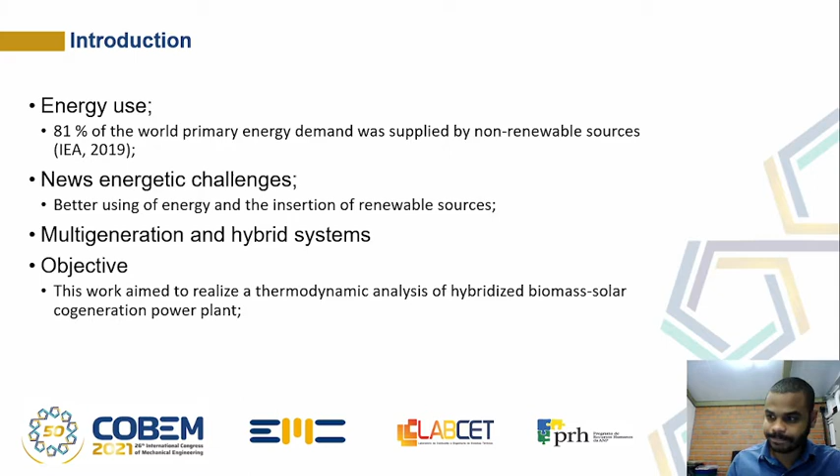With this in mind, multi-generation and hybrid systems can be used in order to achieve those challenges. So the objective of this work is to realize a thermodynamic analysis of a hybrid biomass solar cogeneration power plant. Initially, a biomass power plant was proposed by Siqueira Neto.

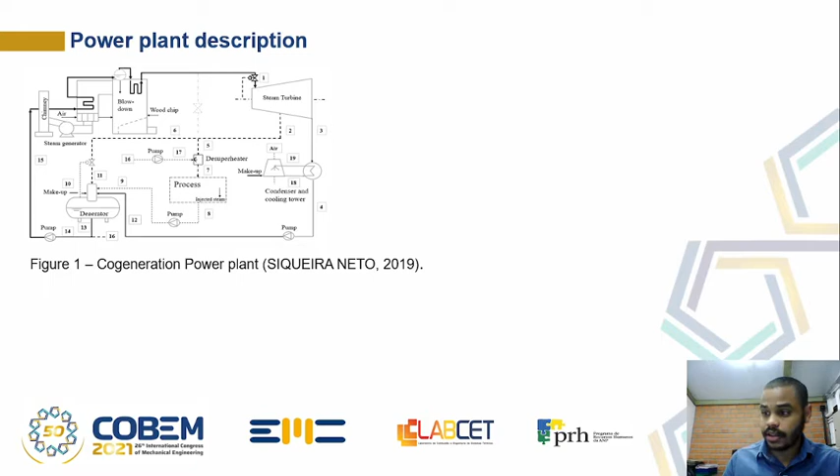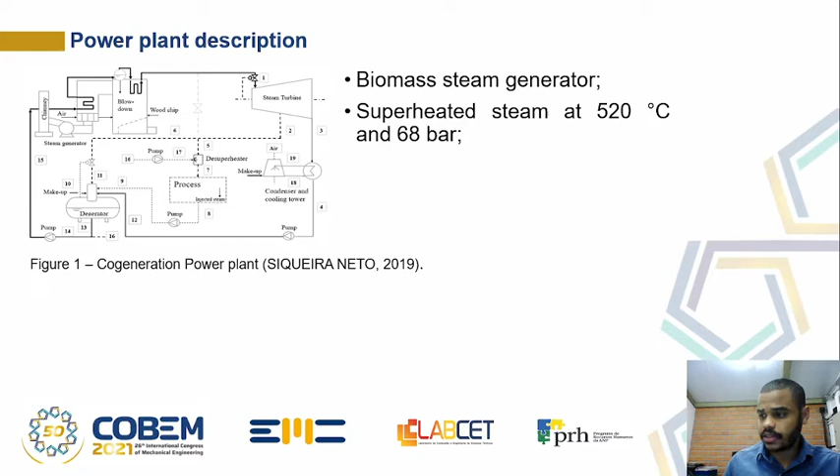It is illustrated in figure 1. This plant was designed to supply the electric and thermal demand of a real poultry industry located in Paraná. The plant used a biomass steam generator with a thermal efficiency of 86% to generate superheated steam at 520 Celsius degrees and 68 bar. The plant is able to ensure 12 megawatts of electricity and 16 tons per hour of saturated steam at 10 bar, doing extraction in the condensation steam turbine.

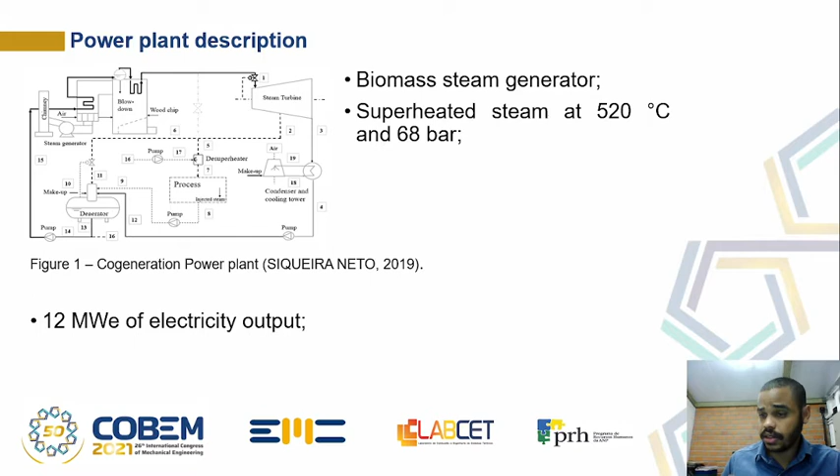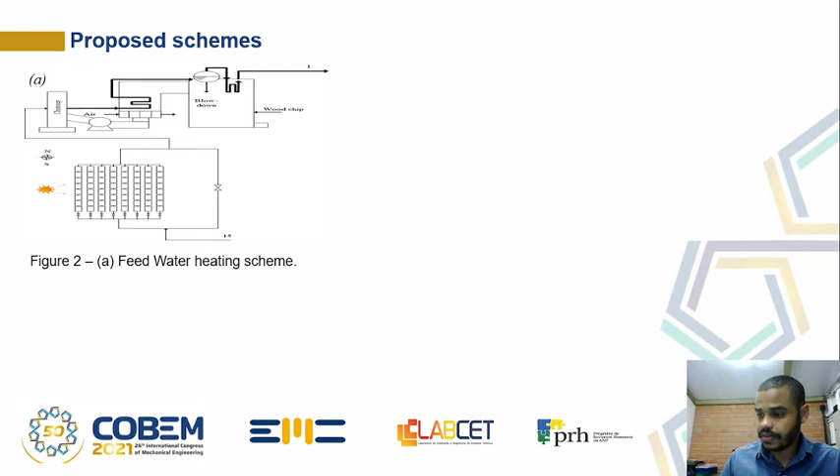Two different schemes were proposed in this work in order to combine biomass and solar energy. The first of them is illustrated in figure 2. It is a feed water heater scheme. Over 90% of the power plants in the world are using the feed water heating scheme.

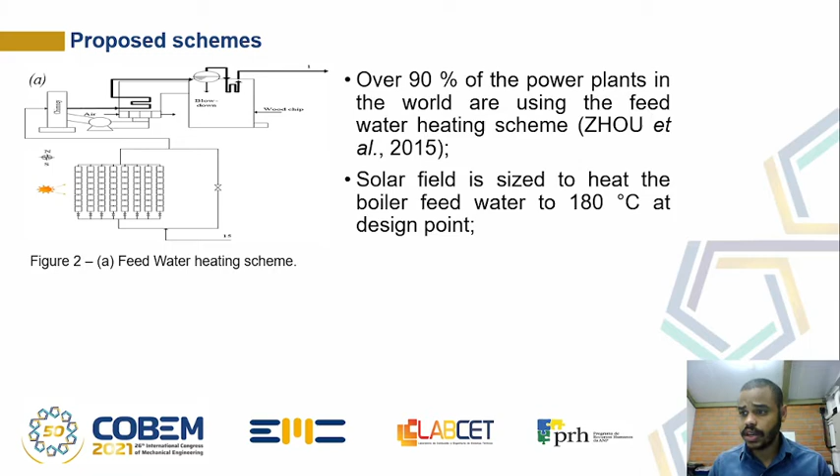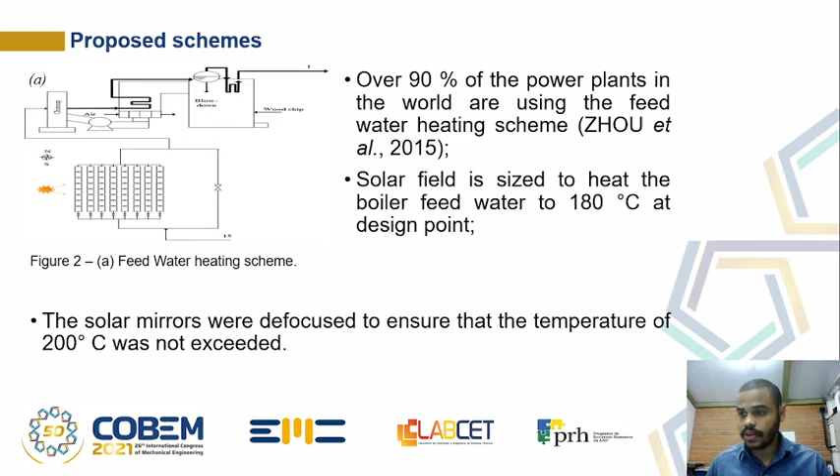In this scheme, the solar field is designed to heat the steam generator feed water to 180 Celsius degrees at design point. For off-design point, the solar mirrors were defocused to ensure that water temperature does not exceed 200 Celsius degrees, so as not to affect the steam generator operation.

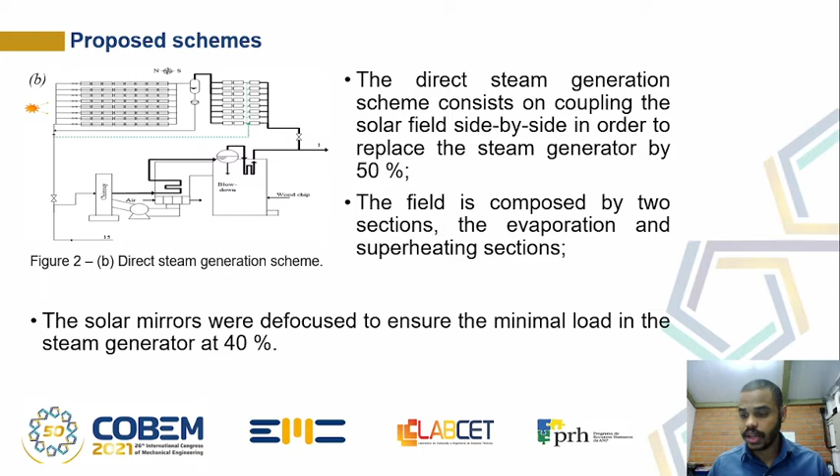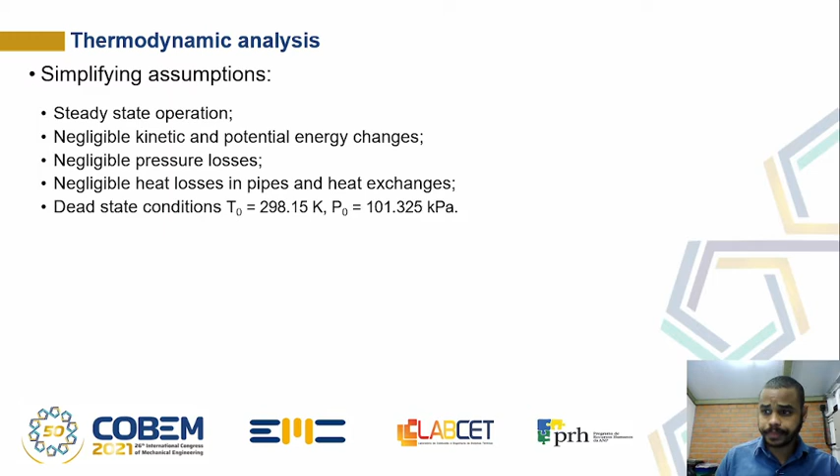Here we have the simplifying assumptions for our schemes: steady state operation, negligible kinetic and potential energy changes, negligible pressure losses, negligible heat losses in pipes and heat exchangers, but considering heat losses in the solar field, and dead state conditions. We applied mass, energy, and exergy balances to all components of our schemes.

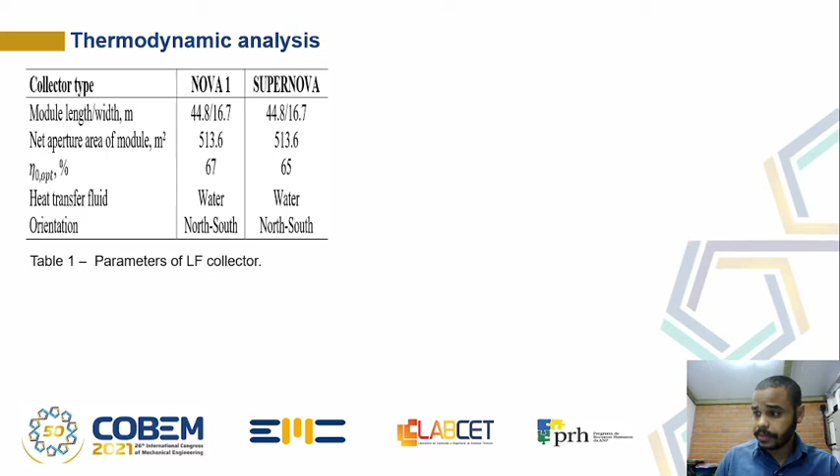Initially on this screen, we show the linear Fresnel collector parameters. To evaluate the energy entering the solar field, we need to take away the losses of the absorbed solar energy. To do this in the feed water heater scheme, we use a model provided by the manufacturer. In the DSG scheme, we also use a model but with a different model for the superheating section.

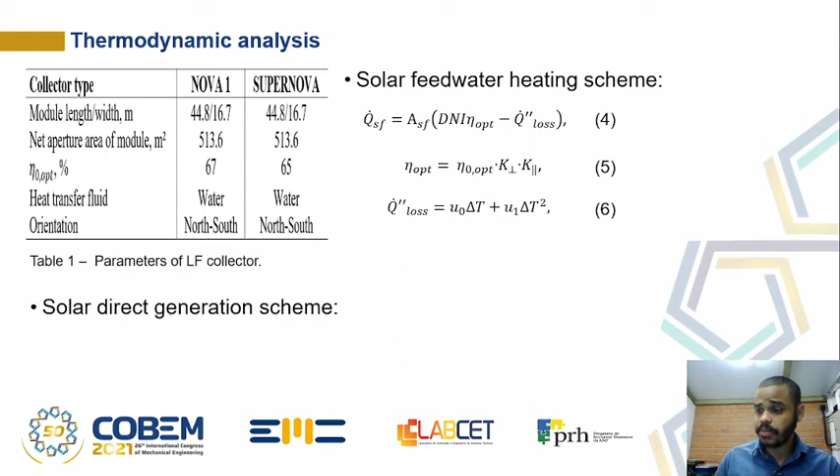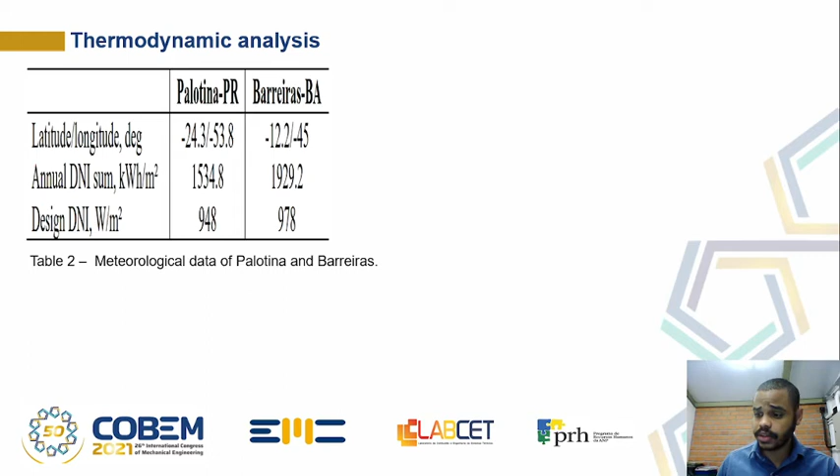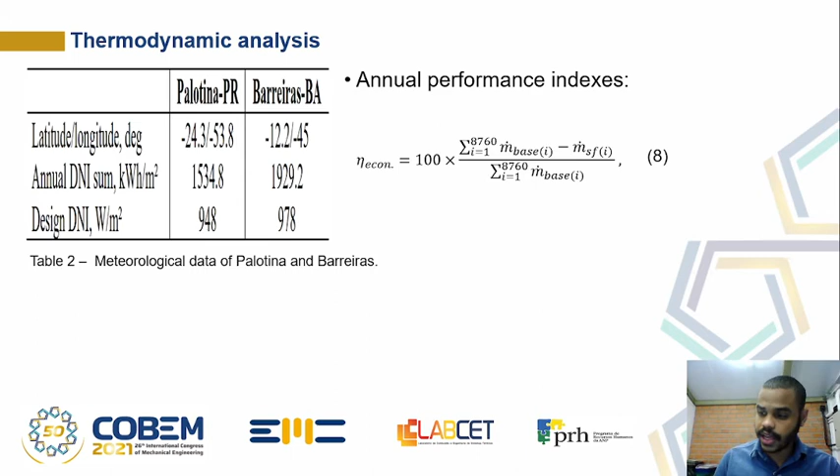Our schemes were simulated in two Brazilian cities in order to assess the region influence. Here we also have some annual performance indexes. The first of them is about the biomass savings related to the scheme without solar energy, and the second one is the annual solar radiation absorption efficiency.

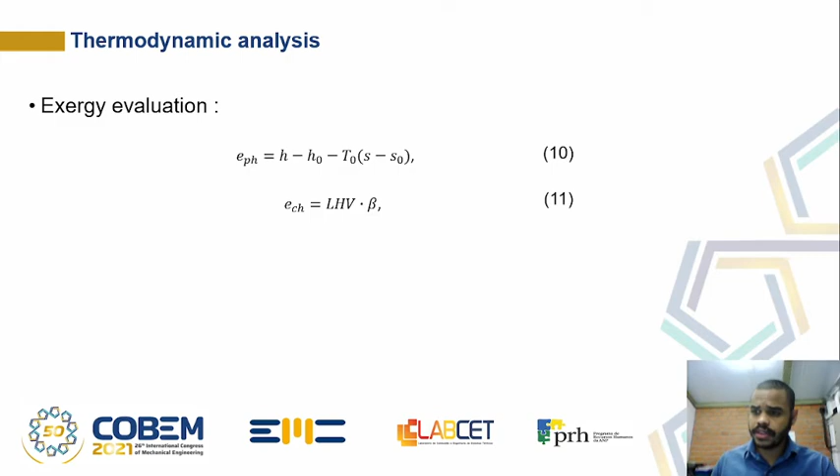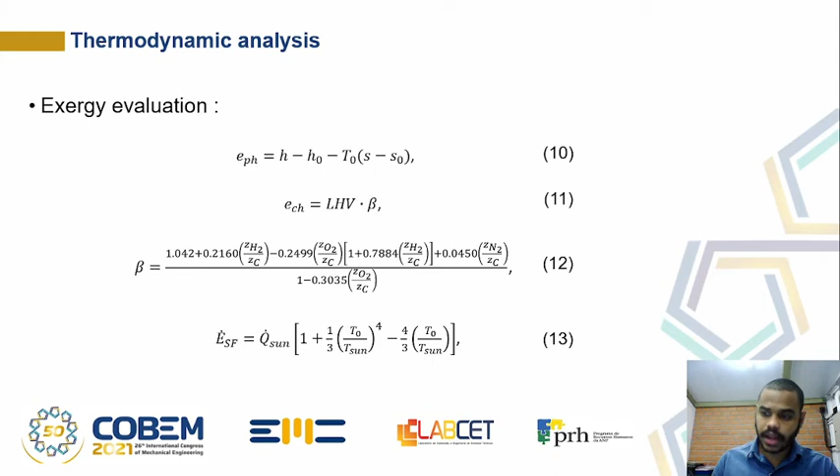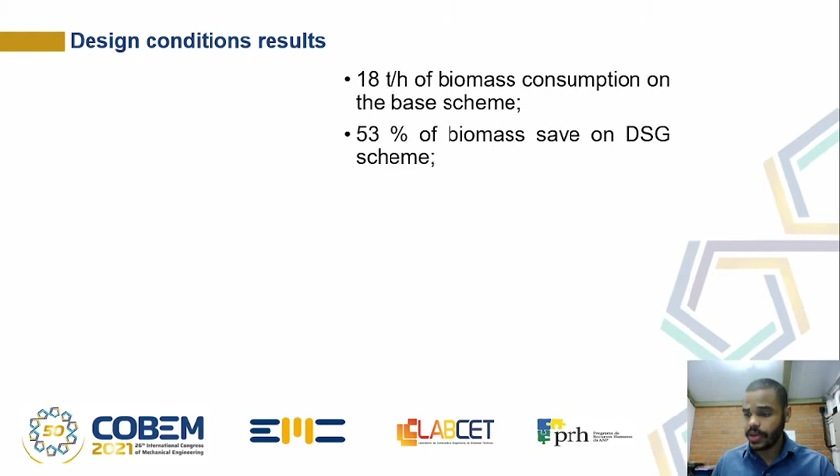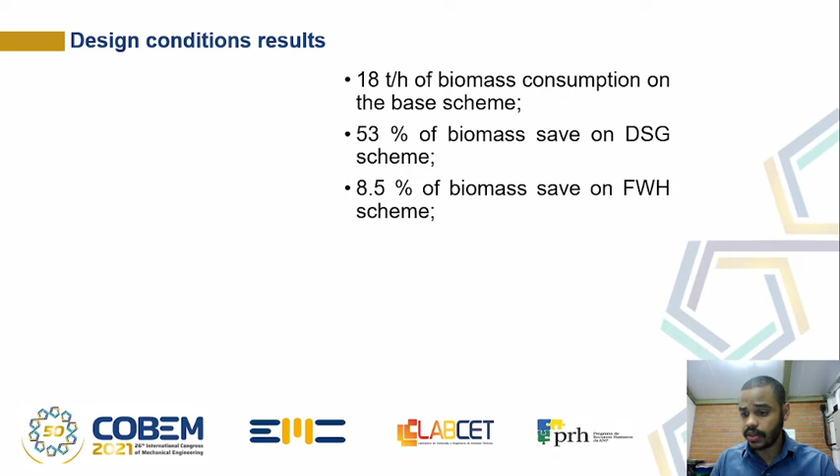Here we show the first results. They are related to the design conditions. The biomass consumption was about 18 tons per hour in the base scheme. In the DSG scheme, we can save 53% of the biomass consumption. In the feed water heater scheme, we can save

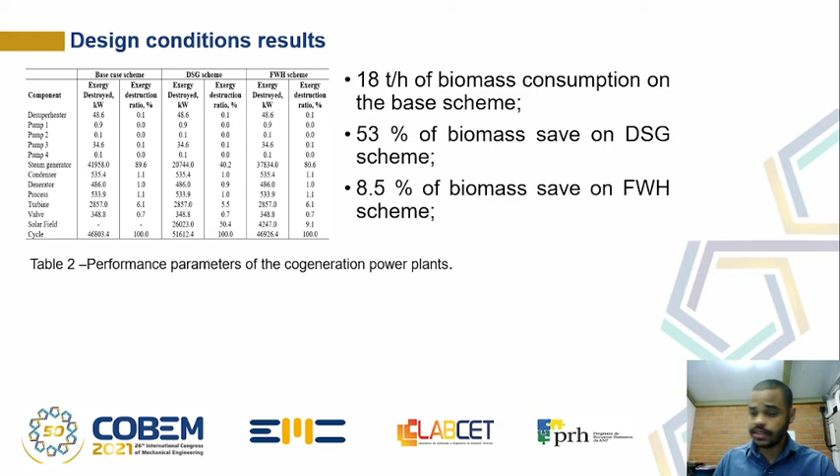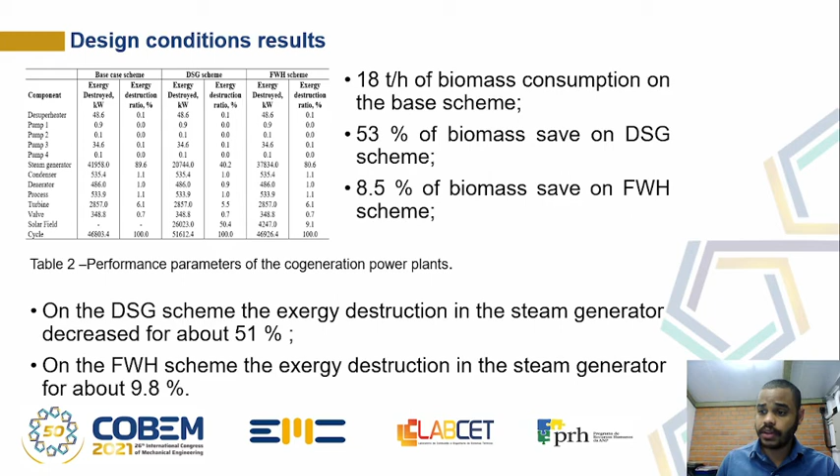8.5% of the biomass. Here we also have the exergy results. The main destroyer of exergy is the steam generator. When we couple the DSG scheme, we can decrease the exergy destruction in the steam generator by about 51%. And by combining the solar field in the feed water heating scheme, we can reduce the exergy destruction in the steam generator by about 9.8%, almost 10%. The overall exergy increases, but there is a lower destruction in the steam generator in both of the solar field schemes.

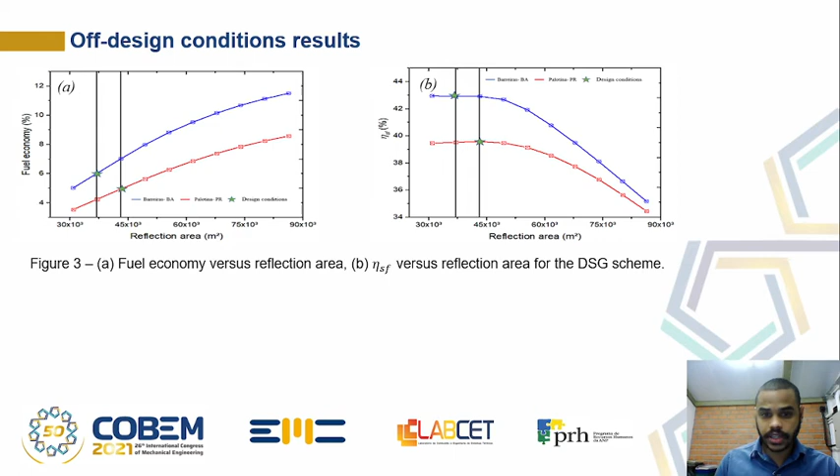Some results for the off-design conditions. On the left side of figure 3 we have the biomass economy. On the right side we have the solar field efficiency for the DSG scheme. The schemes were assessed in Palotina and Barreiras in a solar multiple range of 0.8 to 2.3. With an area at design condition, the fuel economy was 5% for Palotina and 6% for Barreiras. For Barreiras, even using a smaller area, it's possible to save more biomass because of the higher radiation levels in this city.

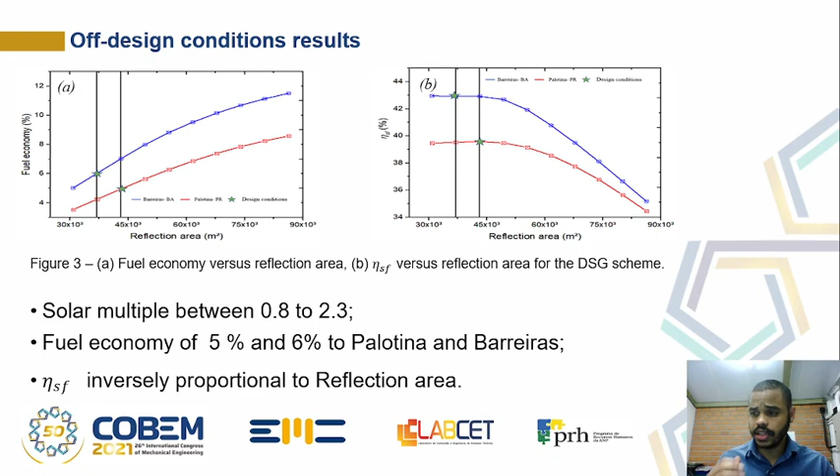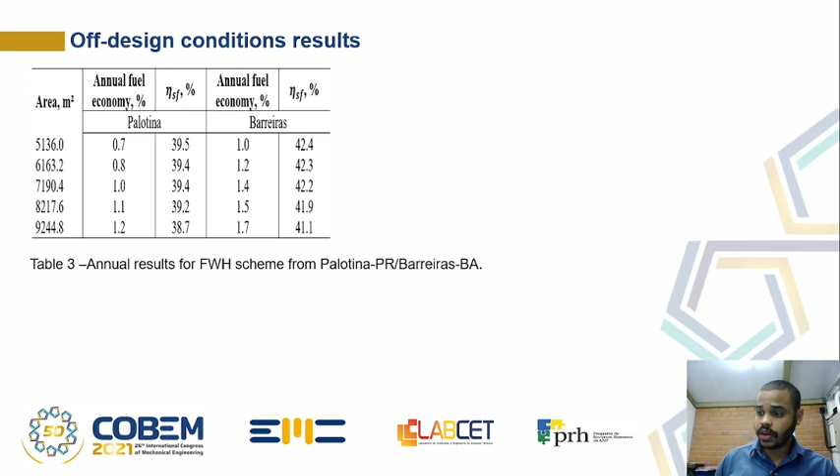Increasing the reflection area, it's possible to increase the biomass economy. However, the solar field efficiency decreased due to the necessity of defocusing to assure the minimal load in the steam generator. On this screen, we have the off-design results for the feed water heater scheme. The annual fuel economy was smaller than the DSG scheme, with slightly higher values for Barreiras. The solar field efficiency did not change more than 1.5%.

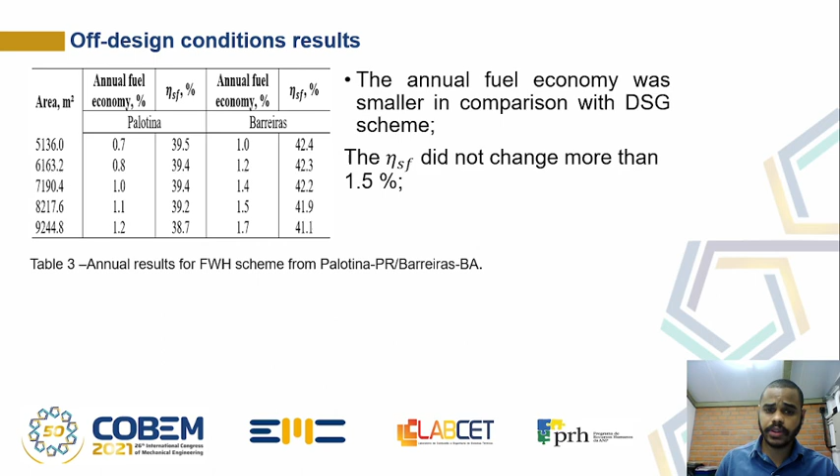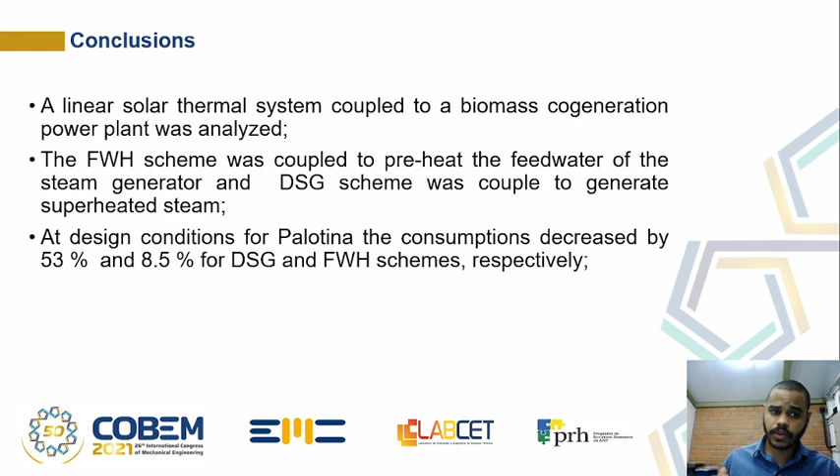Finally, in this work, a linear solar thermal system was coupled to a biomass cogeneration power plant. The feed water heating scheme was coupled to preheat the feed water of the steam generator, and the DSG scheme was coupled to generate superheated steam. At design conditions for Palotina, the fuel consumption decreased by 53% and 8.5% for the DSG and feed water heater schemes respectively.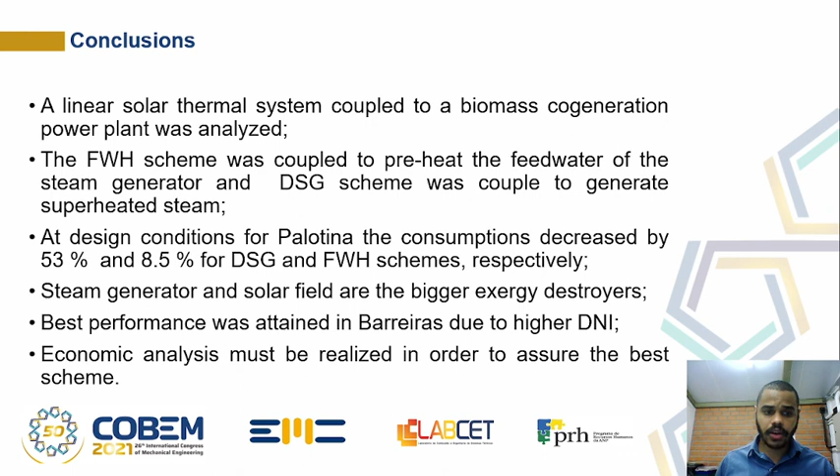The steam generator and the solar field are the biggest exergy destroyers. The best performance was attained in Barreiras due to the higher DNI level. Economic analysis must be realized in order to assure the best scheme.